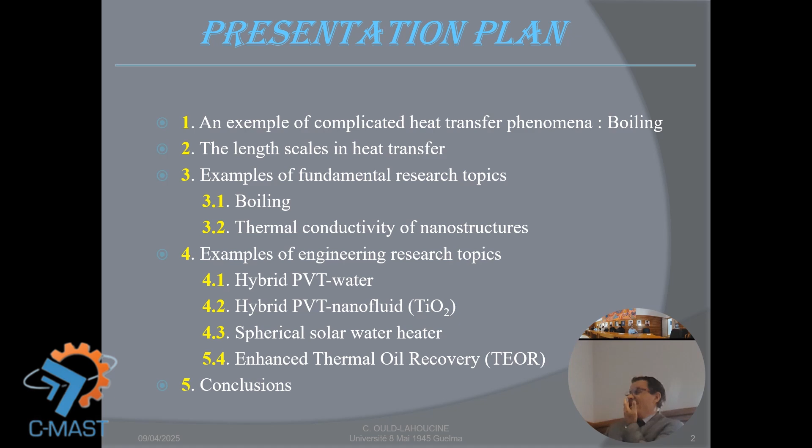And I finish with some conclusion. So that's what happened to me. After I finished the PhD, there is a question: what do I have to do now? Of course, your supervisor decides the topic for you, but once you finish, you have to find your own way. And it's not always easy to find that.

You say, I will continue on the PhD topics. Maybe there is something that everyone is working on, etc. Therefore, I found myself in front of different doors, and I had to decide which door to take. So,

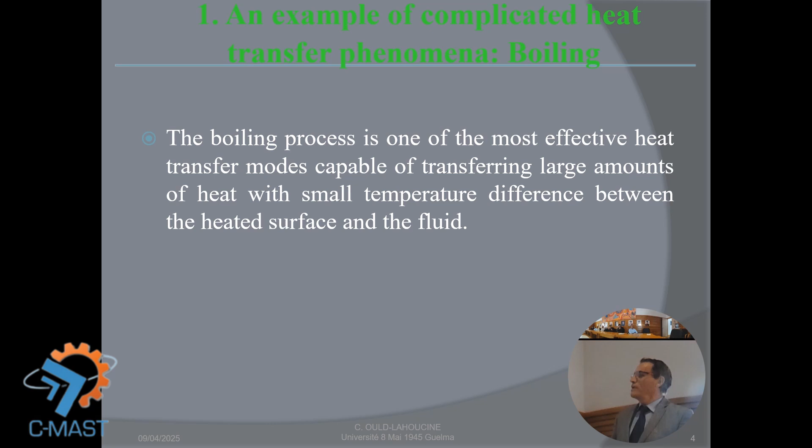the boiling process. The boiling process is one of the most effective heat transfer modes, capable of transferring large amounts of heat. And the main advantage is you can make this heat transfer with a very small temperature difference, which is not the case for the other modes of heat transfer. I will show you in the next slide what I mean by that. So,

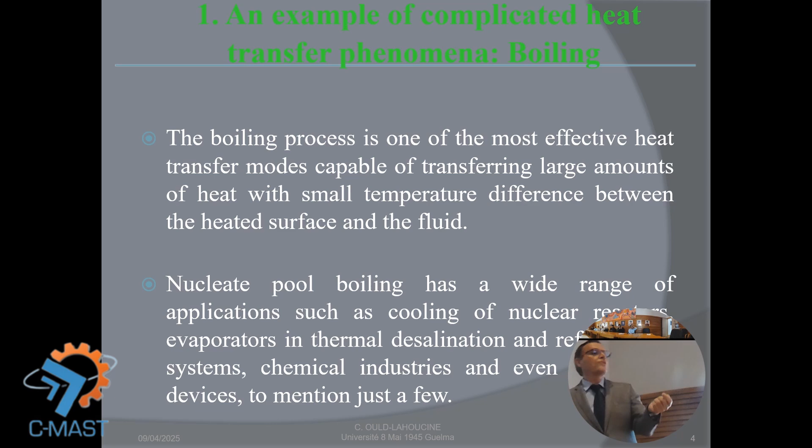within boiling heat transfer, there is what we call nucleate pool boiling. This has a wide range of applications. For example, cooling of nuclear reactors, evaporators, thermal desalination, chemical industries, and even the cooling of microelectronic chips, right? So

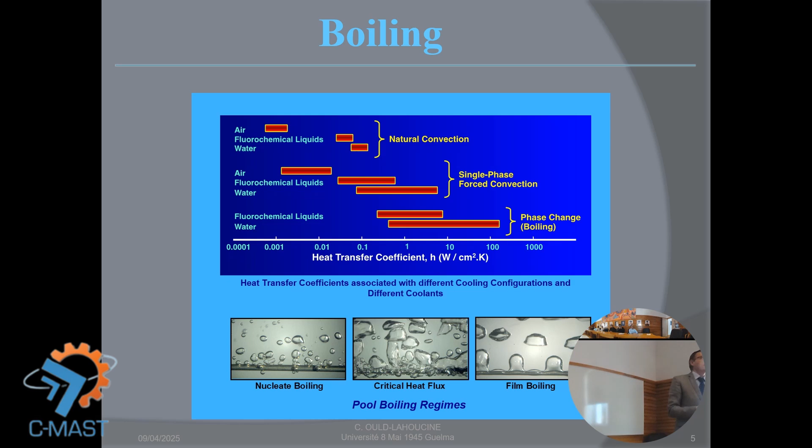because there is a huge amount of heat in nuclear reactors, we need very high heat transfer to remove the maximum of heat. And after that, if you have advanced thermodynamics courses, we can use this to generate vapor, then electricity, and so on.

So we need a high heat transfer coefficient, but we should be very careful about the problem of film boiling. So we need to work as much as possible in this area, nucleate boiling. We get a high heat transfer coefficient while avoiding at the same time the problem of film boiling. So that's an example of heat transfer by boiling.

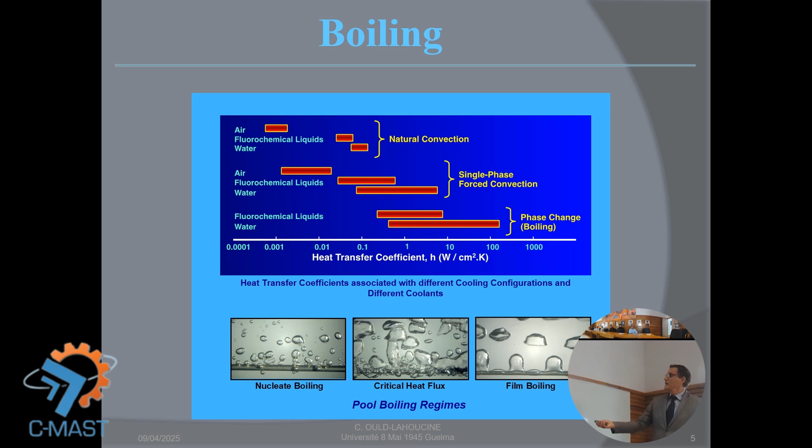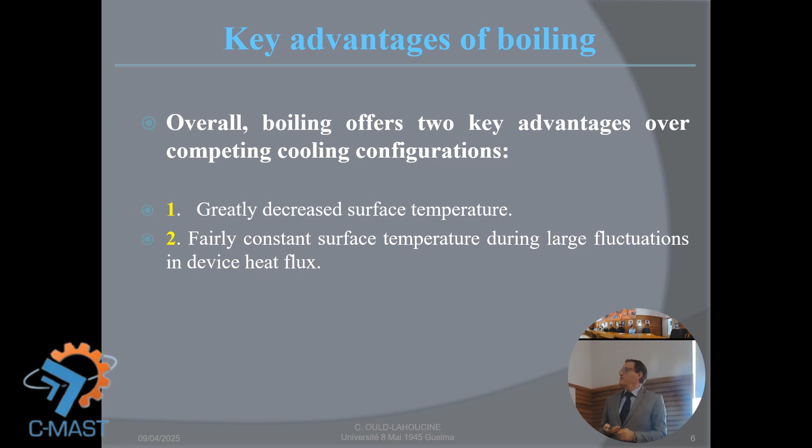Then, overall, to simplify the problem, boiling offers two key advantages compared to other cooling configurations and technologies. The first, as I said, because the heat transfer is so high, we greatly reduce the surface temperature. So cooling is very effective. It's perfect. Next, and this is very important, is a fairly constant surface temperature during large fluctuations in device heat flux. The next slide will explain what I want to say.

Forced convection, you are here, right? So your forced convection, look, here in this region of nucleate boiling, look, this. The slope is so important. What it means? It means that your temperature difference is too small, but heat transfer is increasing so much in this area. So that's why we are interested here.

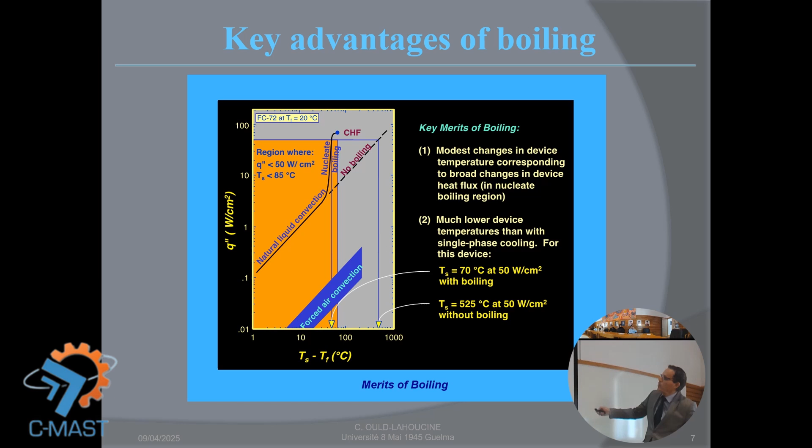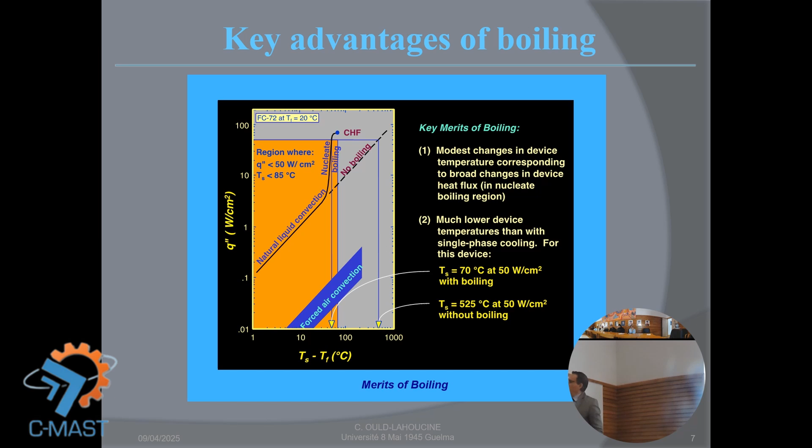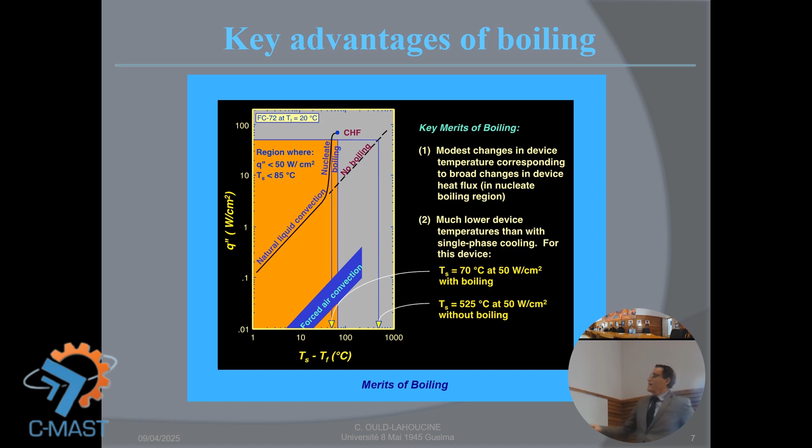Nucleate boiling, temperature difference between the temperature of the plate and the fluid you are using for cooling, right? So it's about very small. For example, this is with boiling, you have 70 degrees. Without boiling, 525. So for sure, you have melting of your nuclear reactors. So that's to show the merit of boiling.

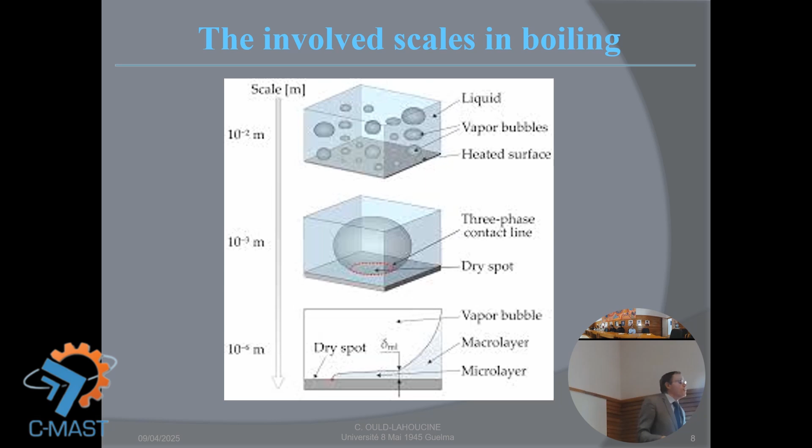So that's the boiling. So we can see here there are different scales to take into account. Otherwise, it's difficult for you to exactly model this complicated phenomenon.

That's what happened, look, it's like the video that I showed. Bubbles are different dimensions and so on. So you have this plate. This is macro scale, or two-fluid model, because you have liquid and vapor.

This is the heating surface, or the heated surface, very important because you need to tackle the problem of interface. How these liquids behave in presence of, for example, a plate in copper. It's not the same with aluminum. That makes this topic very complicated.

And I will show you after that, other things. So if I take one single bubble from this, for example, it behaves on the plate. You have this small groove.

And this is responsible for the nucleus, like a baby. Nucleus, then baby, then a man, etc. Development. And after, we pass away, like the bubble will rise and then disappear.

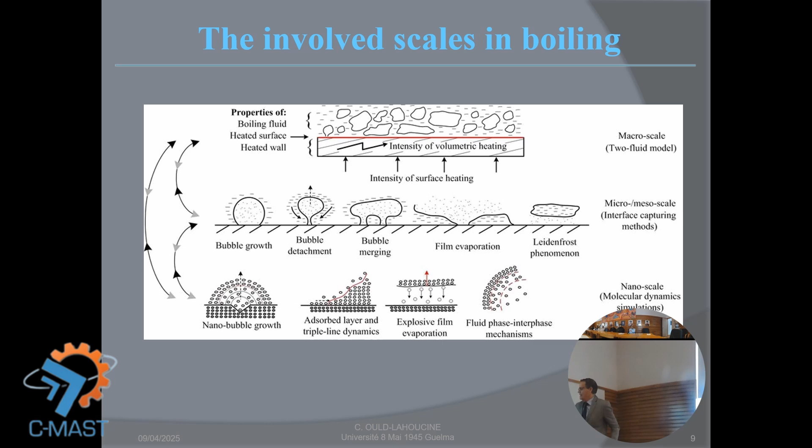So, this is the problem of bubbles. So, different scales.

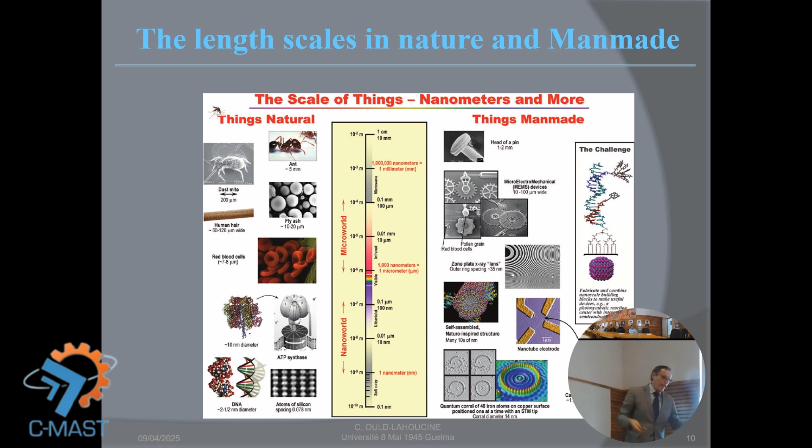This is just to show you the scale of things that exist in nature, the DNA and so on, and for example your hair, etc. This is what humans created by looking to nature, this problem of microelectromechanical systems and so on. So we are trying to fabricate something at the micro scale, and the nanoscale is more complicated, but micro is okay. That's why we use microelectromechanical systems, because it finds applications in different topics, medical and so on. So that scale exists in nature, and humans, in some advanced labs, could even create or fabricate such a small scale.

After that, this is the model. So if I want to model, that's what I was thinking. I said I have to focus on a single bubble, which is wrong, actually. Which is wrong if you think that you can tackle the problem only by modeling one single bubble. This is important to understand, but it's not enough.

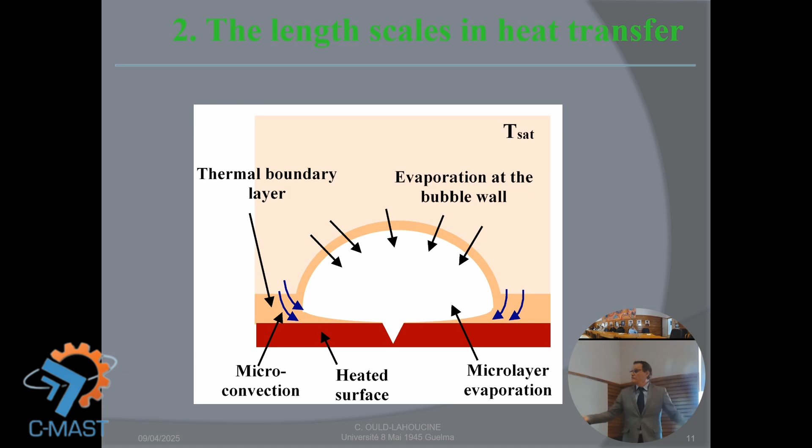So the micro layer, etc. Good. So bubbling, as I said, I return back, because it's created, or the first nucleus is created in a cavity which has a specific angle and depth.

This is shown here. Means that if we use a kind of microscope on the surface of the material, you will find, as you know, that nature is not perfect. I mean, in the way you look at the surface, you feel that it's perfect, but it's perfect only because your eyes' capacity to look at a surface is limited. But if you go down, you find that there are many imperfections. And the idea is like this.

If we want to model the boiling heat transfer, we have to consider everything, of course. Single bubble, yes, but the whole volume. So my idea after I returned back from the United States is to use a kind of statistics. What do I mean by that?

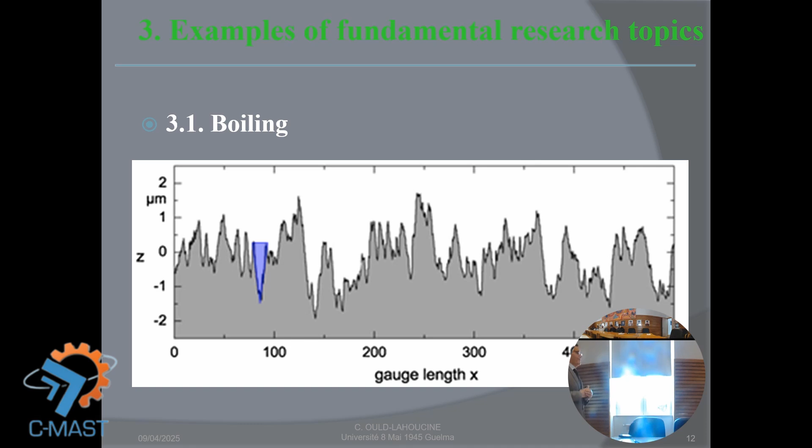Therefore, from the distribution, you can know exactly, on average, what your heat transfer could be using boiling heat transfer, because you can know the number of bubbles and their dimension, and after that you can go down to the scale to model your bubble.

That's what I mean. For example, if you focus on this, look - you will find that here also with a microscope there are other scratched surfaces, and then you can create your distribution, the cavity size range which corresponds to bubble nucleation. This means only in this range you have the number of bubbles that can be created on that surface and detached. The others, none. So you can do some kind of model.

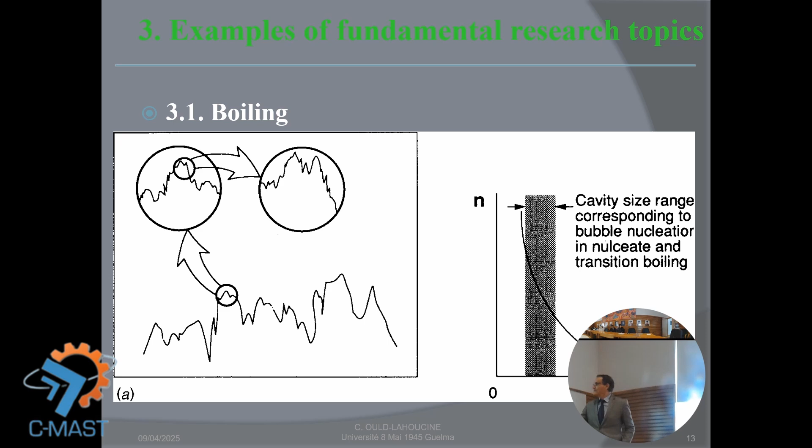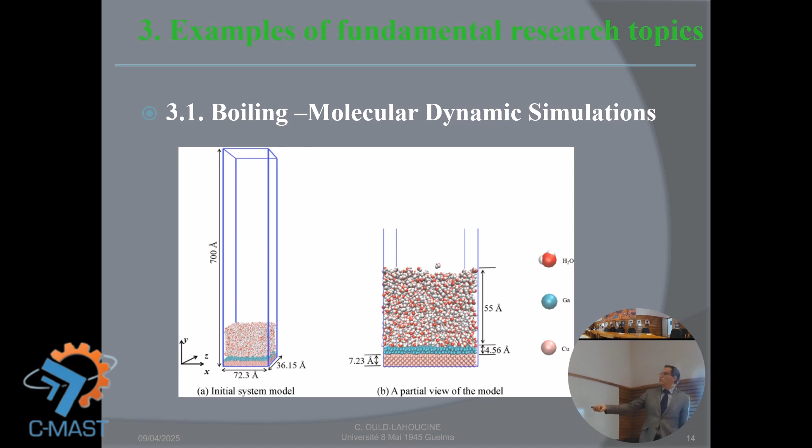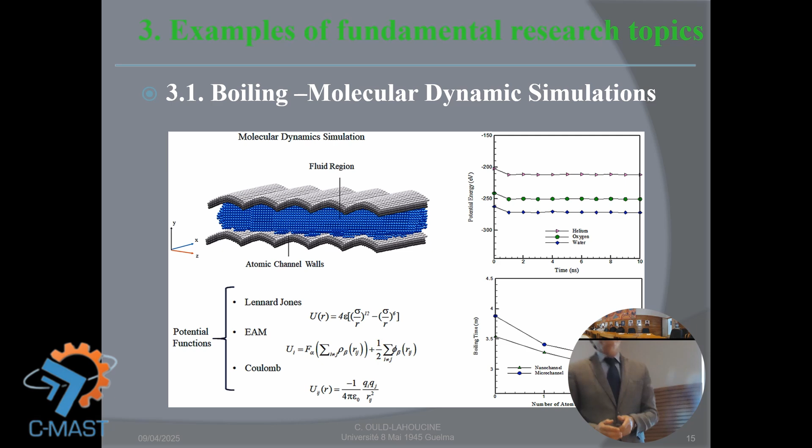But what happens between water and copper, for example? What kind of potential? If you don't have the potential, the forces you are using in the simulation are wrong, because the force is coming from the potential. So those are the weak points of molecular dynamics simulation. Simulation is just for very small scale. And the other problem, the output of that simulation comes from a potential that you suppose is perfect. But in nature, we don't have only the Lennard-Jones potential to determine the forces used in molecular dynamics simulation.

So after I started to learn this nanoscale heat transfer, I said, yeah, that's good. But I returned back to Algeria, I don't have a supercomputer. Even in America, at Georgia Tech, we suffer to get large results from molecular dynamics research. So imagine in my university, we don't have such capacity. Therefore, I have to adapt myself to the actual situation in the university. So I shifted to thermal conductivity of nanostructures. These are nanostructures, some pictures, okay?

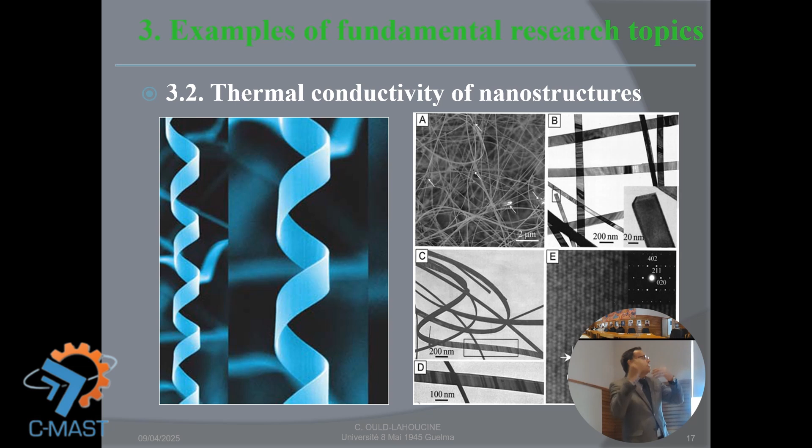Nanotubes and so on. And there are some structures created in the lab by Professor Wang, like millions of Chinese, Wang, but that Wang is at Georgia Tech. Actually, he was even shortlisted as Nobel laureate for physics. He created in the lab different structures with different geometry. This is called a nanobelt, like a belt, you can see here. And even a ring. Of course, he's only interested in creating such nanostructures, and after that, other researchers try to determine their thermal, mechanical, electrical properties, and look for fields where they can find applications.

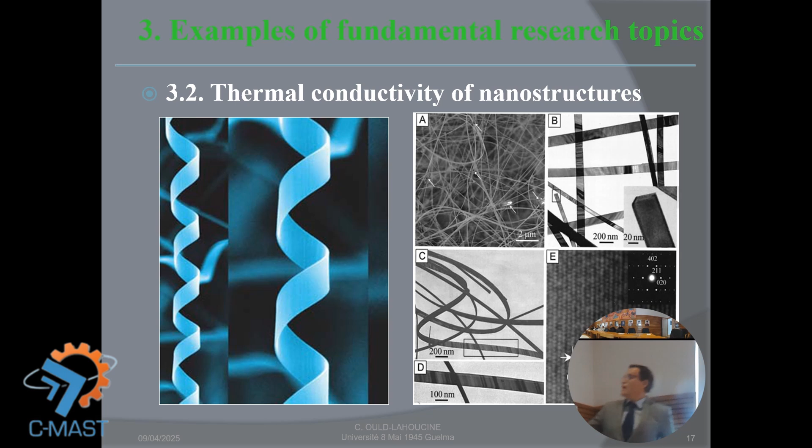So for my case, I said, molecular dynamics simulation, I cannot use it to determine the thermal conductivity of every nanostructure we form. That's impossible. So I was thinking with one of my colleagues and friends in France, Professor Chantrenne, to use what we call the kinetic theory of gas, what we learned in thermodynamics. It looks very strange to use the kinetic theory of gas for solids. Anyway, we tried, and we did some simulation. This is an example of SnO2, tin dioxide.

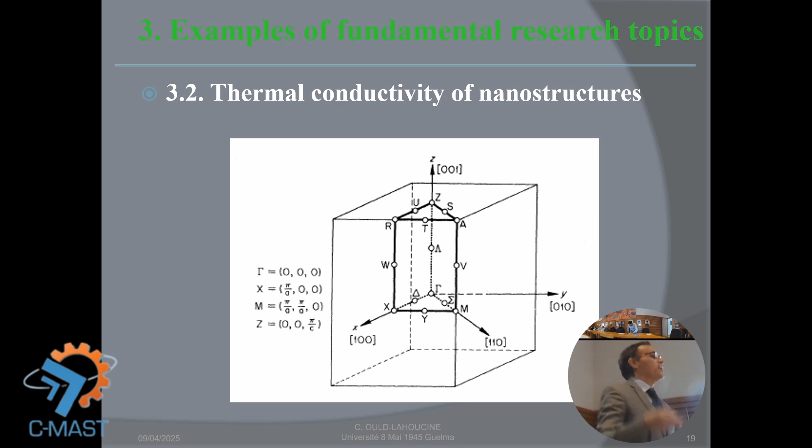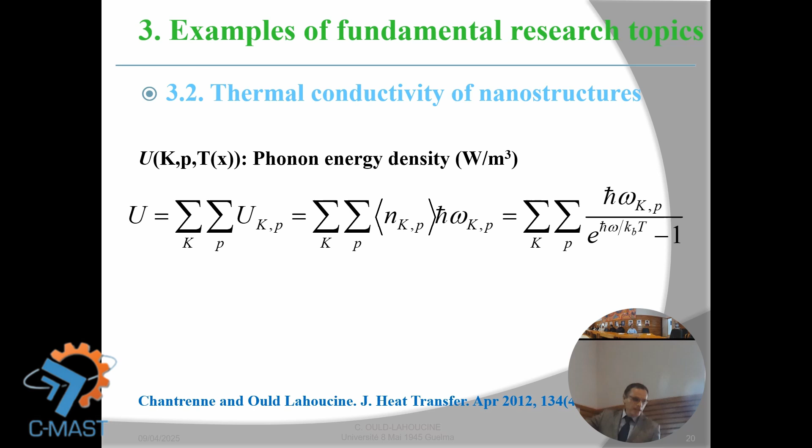Okay, this is physics, so I started learning physics. First Brillouin zone, this kind of thing. I'm coming from an engineering background, so I started looking at books, maybe Kittel, these very famous books, and it's not easy when you are 42 years old, even with kids, everything, but I tried and tried, and I understood the method. Then this is our publication in the Journal of Heat Transfer. So this is the method: you have what we call the phonon energy density, and from that energy we can obtain the heat capacity, which is the derivative of the phonon energy density over temperature. So you see, it's very fundamental research, okay?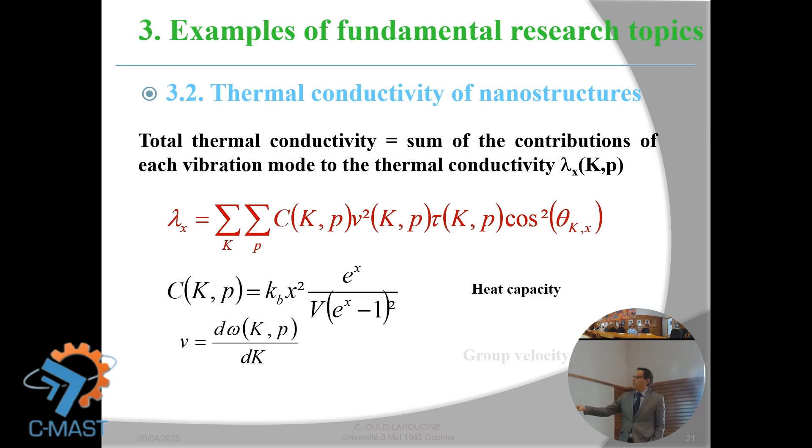So this is capacity and the group velocity and so on. Then I obtained this example. So what we did, actually, I will explain to you. Once you have this model, you have to validate always. This is for everyone. If you are proposing any kind of model, people should trust you.

How can they trust? There are two possibilities. If you have the possibility and capacity to make measurements, that's perfect. You will compare with your own experiment. Or you pick experiments from other guys who have labs with equipment and so on. At that scale it is very difficult.

We are talking about nanoscale, be careful, guys. To find an experiment, even in America, believe me, it's very difficult to make thermal conductivity measurements of nanostructures. It's not easy. Therefore, the method is like this. It is supposed that if you can determine the thermal conductivity of the bulk, the big one, you divide this, and you can obtain the small scale.

So from that model, we go to bulk. And this is thermal conductivity which has been measured by authors, the name is Turks et al. And this is our calculated values. So we can see within this range of temperature, very low up to ambient room temperature, the fitting is very good. That means the model is working. That means we did some kind of validation. After that, I can use this model to determine thermal conductivity of nanostructures.

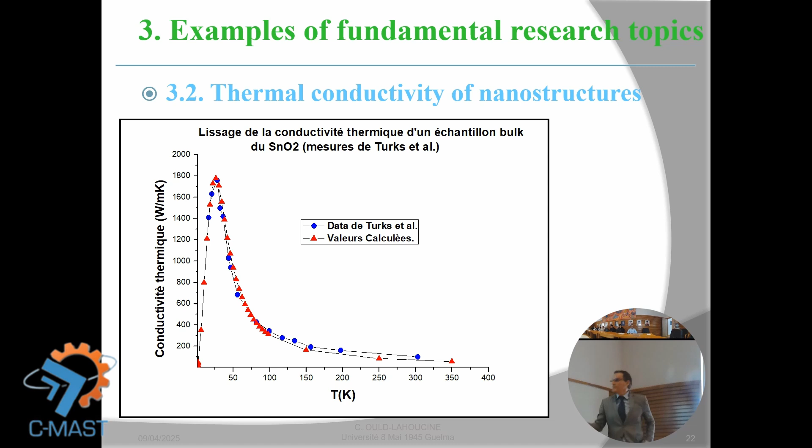So I will show you something interesting. That's the picture. There is one professor who is very famous, he graduated from the University of Berkeley, Li Shi. He's of course Chinese, maybe the name makes it easy to guess. So Li Shi made measurements.

So this is a measurement of Li Shi, for example, a nanobelt of 64 nanometers, right? Yellow is the model proposed by Li Shi. Li Shi is using a Boltzmann equation. So it works for 64. Now, this is the model of Li Shi for 53 nanometers, thinner. And this is the measurement of Li Shi for 53. Wow, huge difference. This is our model for 53. Perfect.

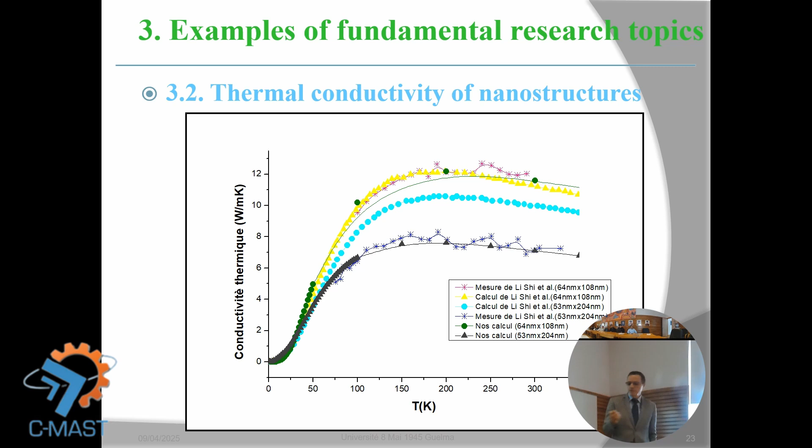That means this method works very well for a specific kind of nanostructure, not everything. For example, some very complicated shape, no. So this is the physics. I don't know if you had such lectures before, what we call the first Brillouin zone. From that Brillouin zone, we use some calculation to determine the wave vectors, and then we make the sum, etc. So that's physics.

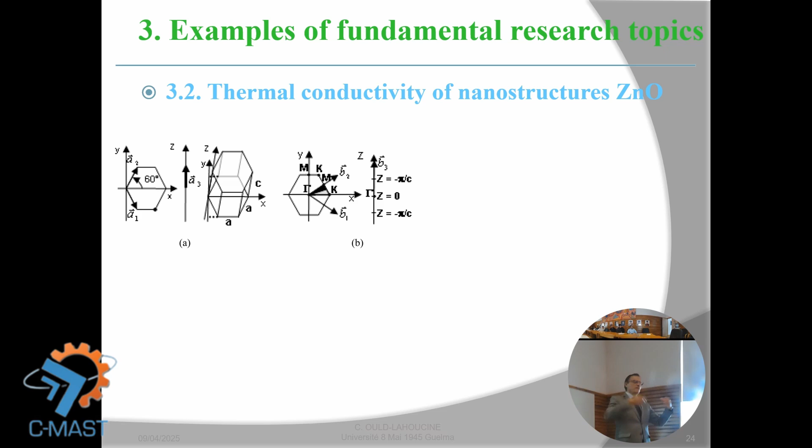Now I pass to engineering. I returned back to Algeria, as I said, and we need to do some engineering projects for our country. One of them is the hybrid photovoltaic thermal PVT collector. As you know, this system can give you simultaneously electricity and hot water, right?

That's good, specifically in some remote areas that don't have access to electricity. In Algeria, of course, because we have natural gas, electricity is almost everywhere. So no problem. But anyway, we can propose this kind of system to some African countries that don't have anything. No electricity, no water.

So the problem here, in hot countries, as you know, with photovoltaic panels, once the ambient temperature goes up, the efficiency goes down. That's a big problem. Therefore, people are always looking to cool such systems. Generally, as we see here, the water is under the PV, right? So the problem is not solved, because solar radiation is coming directly on the PV panels. Of course, you have hot water. This is probably good for Denmark or wherever, but not for Africa, right?

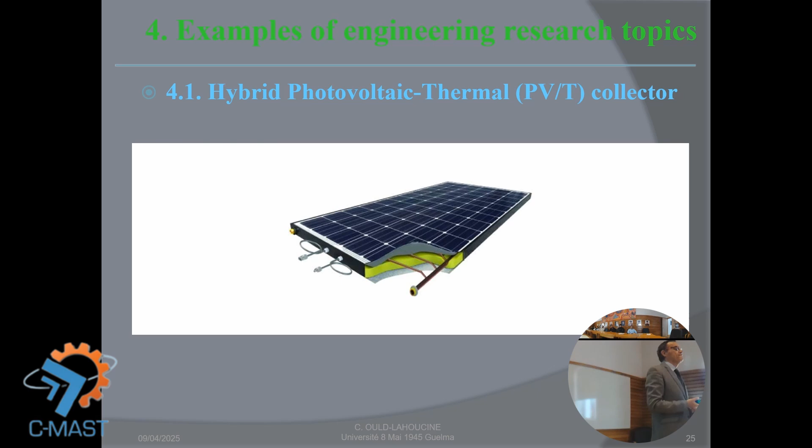So my idea came when I was looking at one article in Nature. In that article I saw that water absorption depends on the wavelength. The majority of the wavelengths that water absorbs are in the infrared. Infrared is responsible for thermal energy. But the visible, no. It's a kind of window that allows the visible to pass. And visible is exactly the wavelength that photovoltaics use. So for me, it's the contrary. I have to put water on top of the PV.

If I put water on the top, water will absorb infrared, giving hot water, and visible light will pass directly to the PV. So I protect my PV panel. That's what we did. So this is the solar radiation, right? And we can see here, look, this is water spectral absorption. It passes, but in that region of wavelength, it absorbs maximum. So thermal energy is absorbed here, and visible will pass here. So this is perfect.

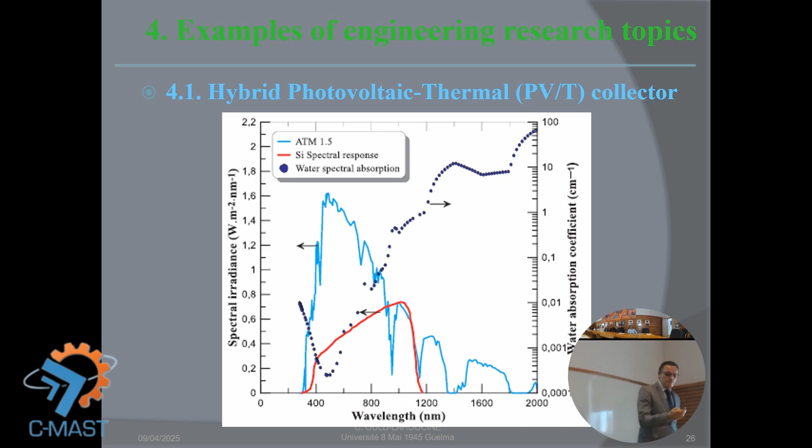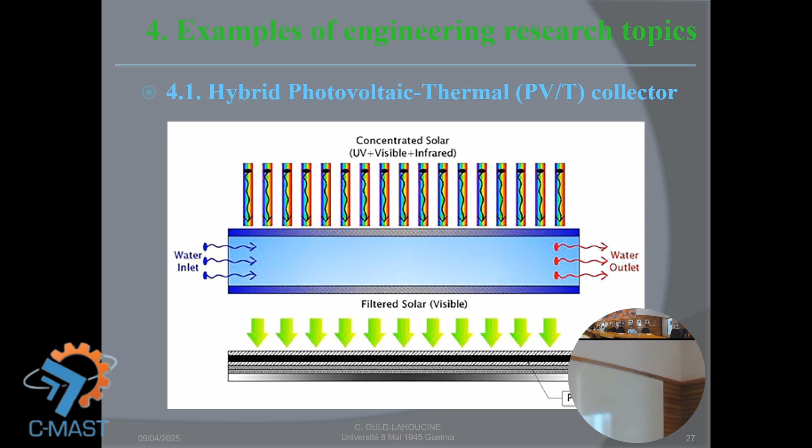Now I have to make a proof. So that's what I mean. This is water, solar concentrated, so it passes. So we have the visible and the infrared together. Okay, so it passes. So water will absorb infrared, hot water goes outside, but visible passes directly to the PV. Good solution for hot countries. So that's the system we propose.

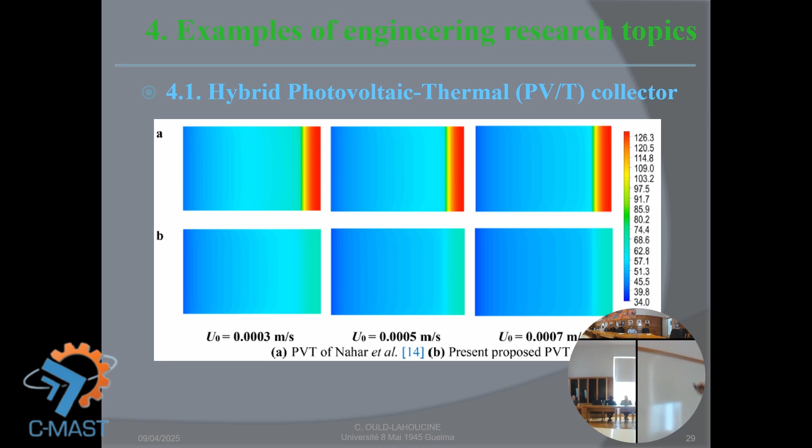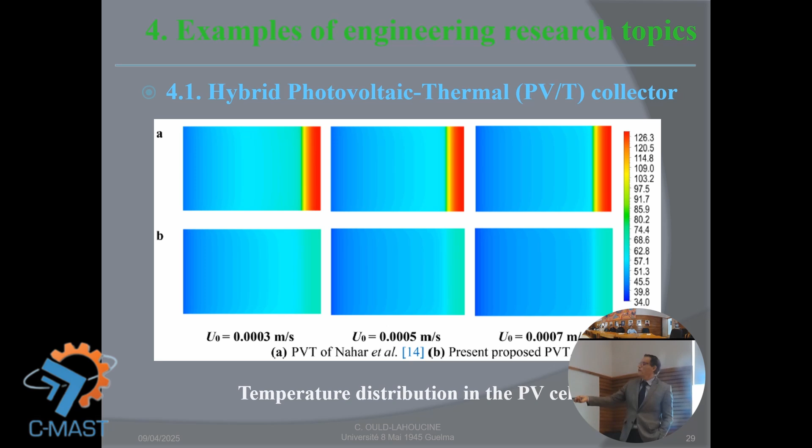But the proposed one is this one. Look, cool. We don't have this kind of hot spot on a specific region, specifically at the end, because after it's hot, warm, and then this is a problem. Sorry. That's an example, and interesting.

So during this modeling, I found something very interesting. Look, in this system, actually, I didn't use the serpentine. I use a channel, because in order to cool the hot surface, I use the channel. But once you're using the channel, there is a height of such channel. So one question which is logical: which height do I have to select? 1 centimeter, 2, 5, by chance? In fact, it's not like this.

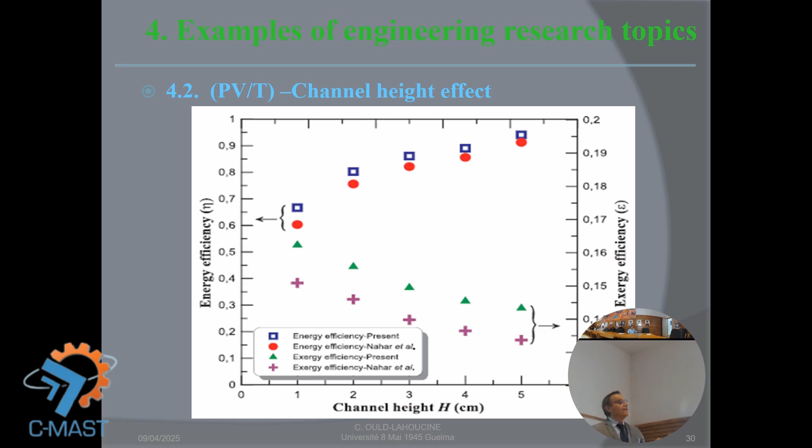Now, in energy, we have also something very important. We call this exergy. What is exergy? Exergy is a quality of energy. Energy doesn't have the same quality. I explain. Electricity is better. For example, today, if there is no electricity, no presentation, but if you bring with you, for example, hot water for me, you give me energy, but I can do nothing with this hot water to make my presentation. So this is energy, and electricity is also energy, but the internal quality is not the same. In PVT, because we need electricity from PV, we have to look at the exergy.

So what happened? Sorry. What happened to this? What happened to this also? To go back? Okay. I don't know. So in exergy, I have to return back.

So what we notice in terms of quality, the quality is working exactly contrary to the efficiency. Means if you increase the height of your channel, quality is reducing. So it's kind of competing effects. And here comes what we call optimization. We need quantity and we need quality at the same time. So competing effects means I have to find a model to determine the optimal channel height. And I succeeded in this.

After that, okay, this is the problem with nanofluids. Everybody heard nanofluid, nanofluid. Nanofluid is increasing heat transfer. Nanofluid is perfect. Okay. There are two main problems. Agglomeration. You know these kinds of particles? They go down. So there is a problem with the pumps. The other problem: in theory, nanostructures are distributed evenly around the whole volume, but in practice it's not that way.

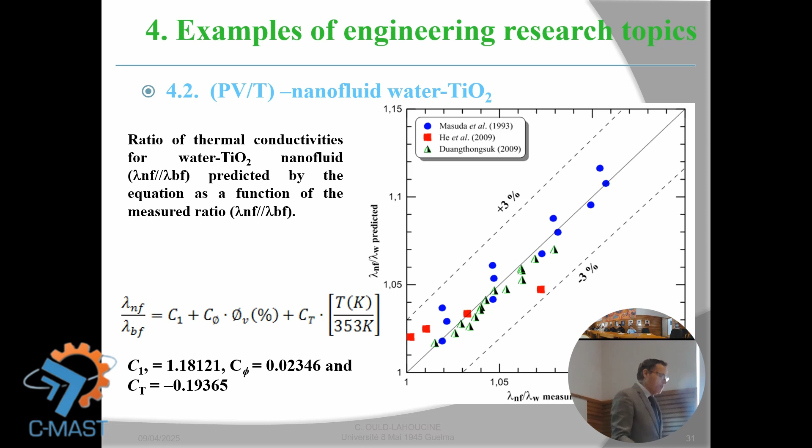Okay. Myself, I proposed this nanofluid type, titanium dioxide nanofluid, and we tried to see if this is really improving heat transfer with the PVT. What we find at the end is different, because this is an equation that I proposed, even as a new equation to determine thermal conductivity of nanofluids. But what we find,

That's what I found. And I was not afraid of the reviewers of international journals. Because if you send to a journal and you are from Algeria, yeah, you have to be fair, people don't trust you so much. They don't know me, what kind of research I did, etc. They said, wow, this guy is really nothing. How can he send us a paper where his research of PVT with nanofluids is very low compared to water? And everybody is saying that nanofluid is the best. Reject.

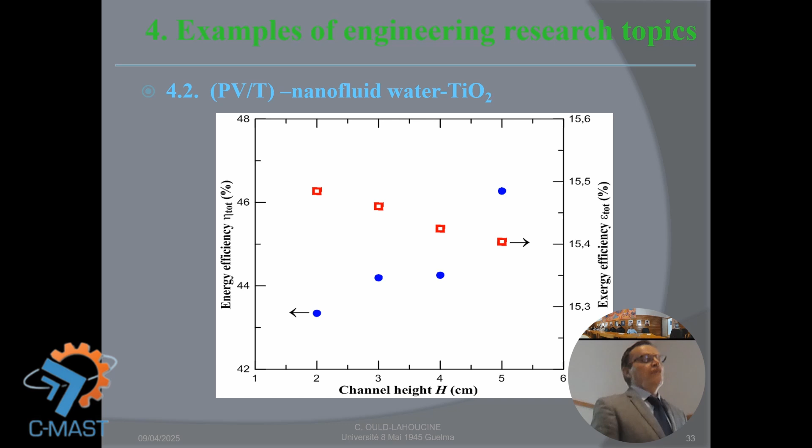So what I did, I sent the paper as it is. It's not good to modify your results. This is also an advice to the young generation. Professors like me, or better than me, they know. But for the young generation, if you check everything and you find the result, look at that result, be confident in yourself, send the paper.

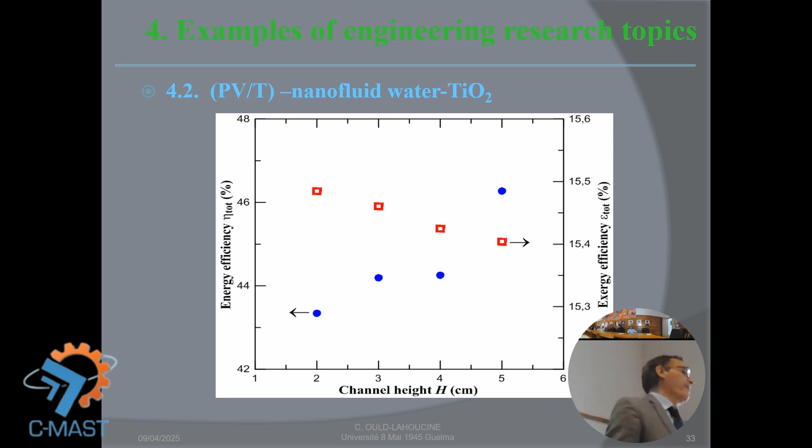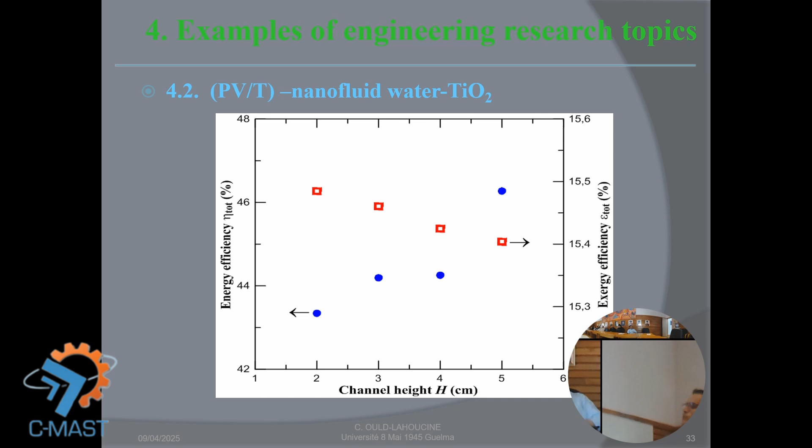The most important discoveries came from something that we didn't expect. If you expect something, everybody will know that, so it cannot be something original. Okay, so here I was thinking about how to determine the optimal channel height. And I found something here. By combining exergy and energy efficiency, I found that there is a kind of inflection point. At that inflection point, this is the optimal height of the channel, 3 something centimeters for that condition.

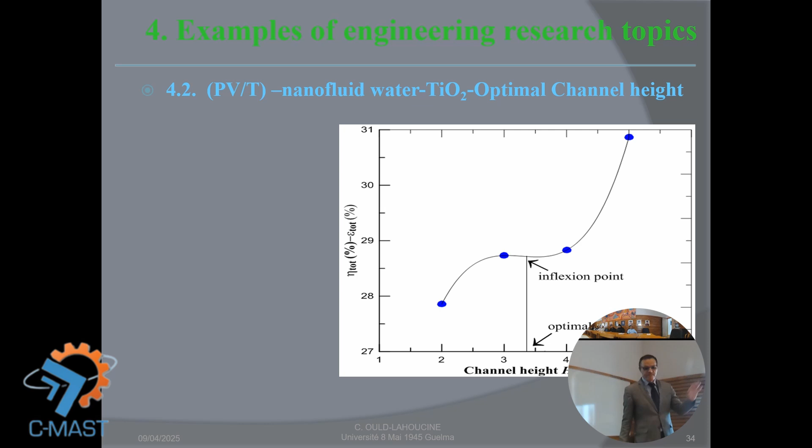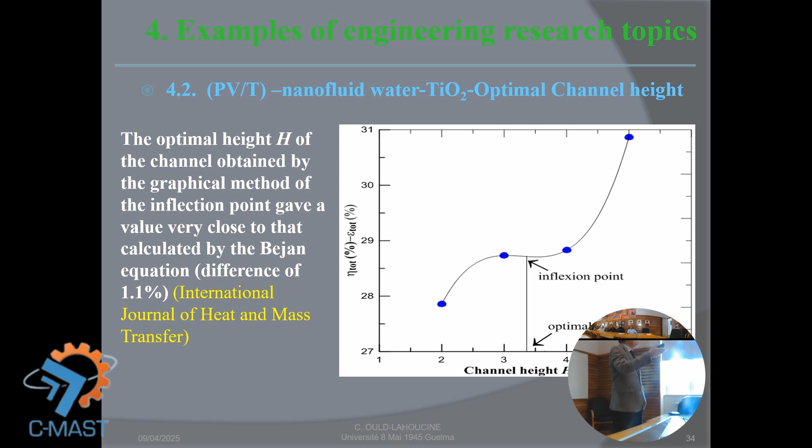That's perfect. It gives you the best in terms of quantity and quality, right? And I compared this method, the optimal height of the channel we obtained, to someone the professor knows very well, Professor Adrian Bejan. He's very famous in thermodynamics and for optimizations. He even has a non-dimensional number with his name, the Bejan number, right? So the difference is about 1%, using the equation of Bejan to find the optimal height versus the proposed method of inflection.

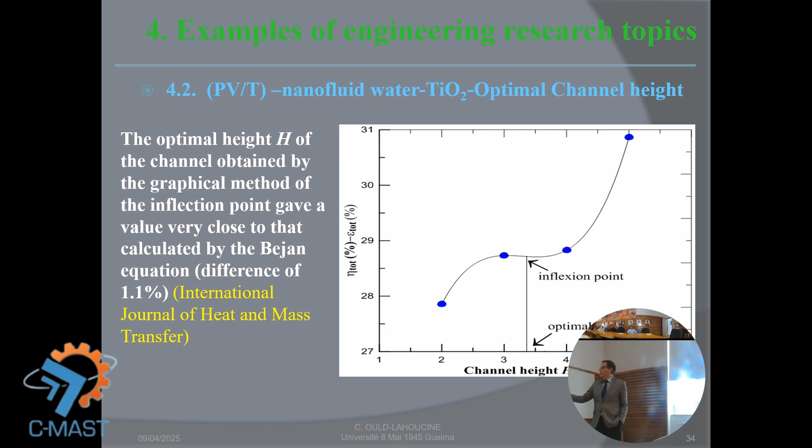So this is my conclusion, actually. I said the water titanium dioxide nanofluid-based hybrid collector has, at least this is what I found, no substantial advantage over the one based on water. And everybody, even one of the reviewers, I sent it to Solar Energy, said no, it's very uncommon. So when I had to answer the reviewers, I said, of course, this is based on my result. If you found any contradiction or something, just reject it, finish. I cannot say anything, that's what I found.

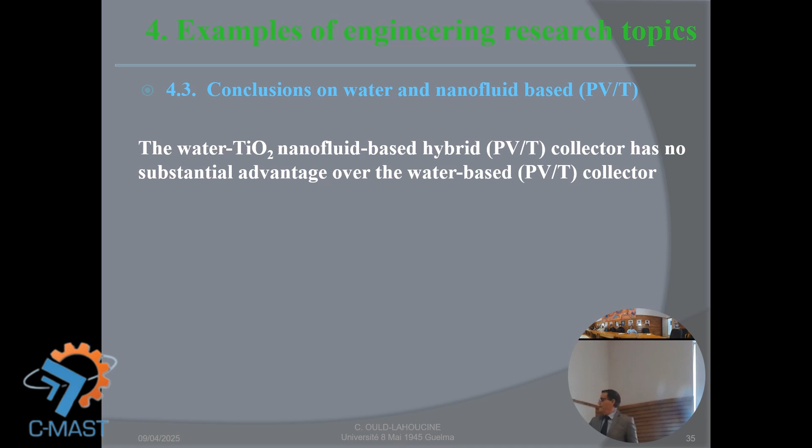Next, so that's what I said, I don't follow the trends. That's my career. I don't say this is the best career if we compare, but that's my own way. I don't follow trends. I just set my own goal and go for the extreme. I do my best. Okay?

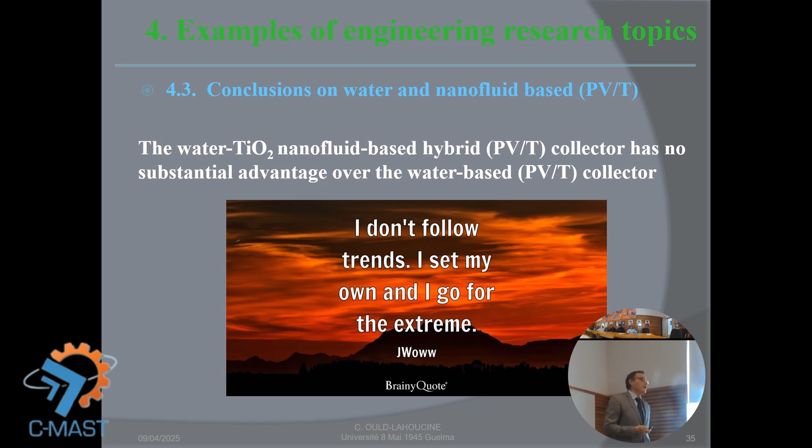Then I proposed something new also, a spherical solar water heater. This is also something interesting because in solar energy, as you know, the sun is not sitting the whole day in the same position. Therefore, your efficiency is not the same the whole day, right? So the idea is that if you have a spherical surface, at every time there is some part of your collector that is receiving electromagnetic energy from the sun.

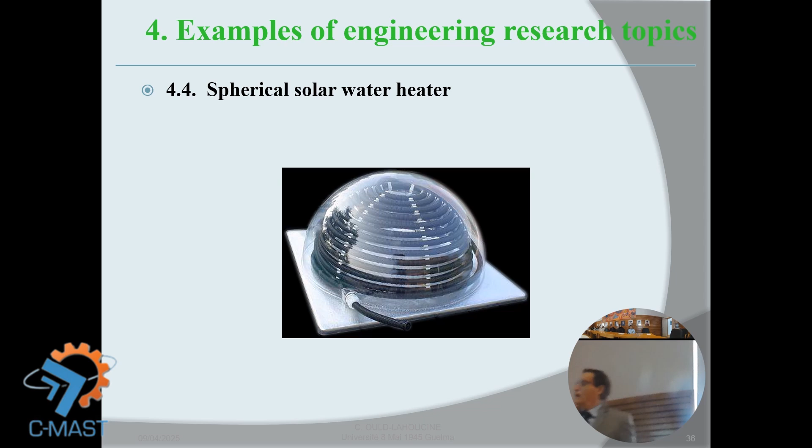But generally what they did, because this idea exists already, they separate the collector from the tank that you have to store your thermal energy. But for my case, to reduce the volume, etc., I said, why not put it inside? Generally they use the spherical one, right? For my case, I said probably there is a kind of optimal geometry for the tank that could store the energy more efficiently.

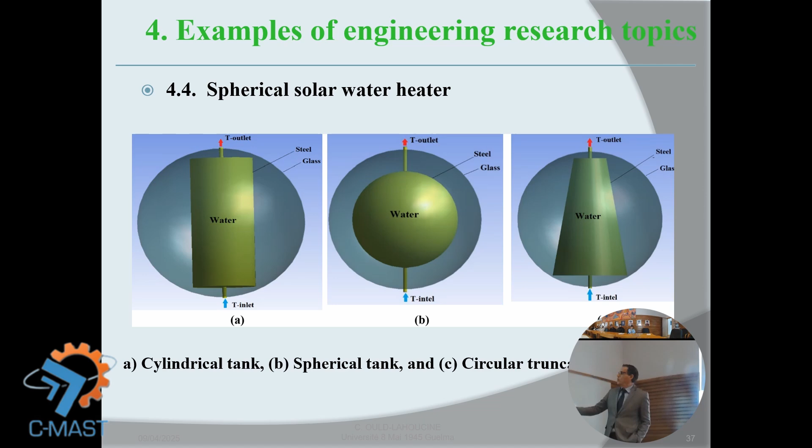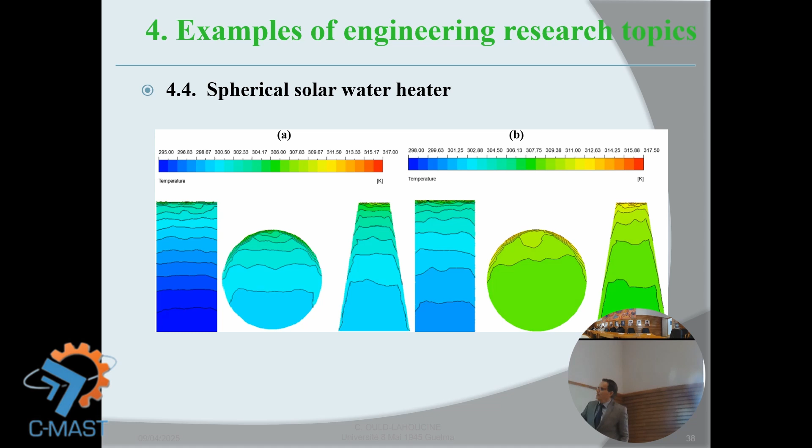And here we see that the majority of the volume has the same temperature, meaning there is mixing between the fluids. Here, no. Look. So the conical one and the cylindrical one are better. This is time, okay? This is for 600 seconds, and this is for the double, 1,200.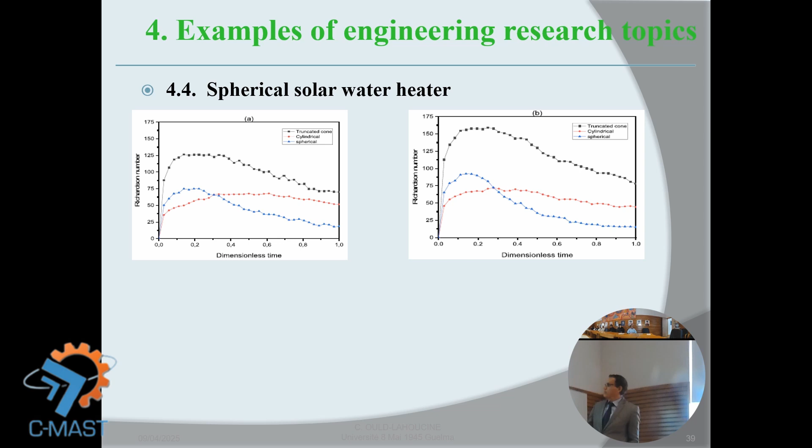So if you are using such equipment of solar energy and you want it to be used for a long period of time, it's better to use the spherical with the cylindrical one. But the best, if we compare in terms of efficiency and quality, is the conical one. So I tried to make a patent also about this, but not yet. So this is the Richardson number to compare between them. So I arrived at something very interesting.

Maybe also I'd like to take a little bit of time. So one day I was invited by one of the biggest oil companies in the world, the Algerian company. Because of this company, we are eating bread, as we say, because a lot of billions of money is coming from, as you know, oil and natural gas. And they invited me to make a research proposal. Good. So I was happy.

So there is a very interesting topic. This topic can bring billions of dollars to our company, not millions. The enhanced oil recovery project. I will explain to you.

So, the oil we can extract is not everything. The oil has high viscosity, so it's stuck on the rock, deep inside. And with our technology, we cannot extract such petrol or oil. And sometimes the quantity that we cannot really extract is around 60% of the whole reservoir. So you just extract like 40%. So that's what I mean. The recovery rate is the percentage of recoverable oil compared to the total amount initially in place.

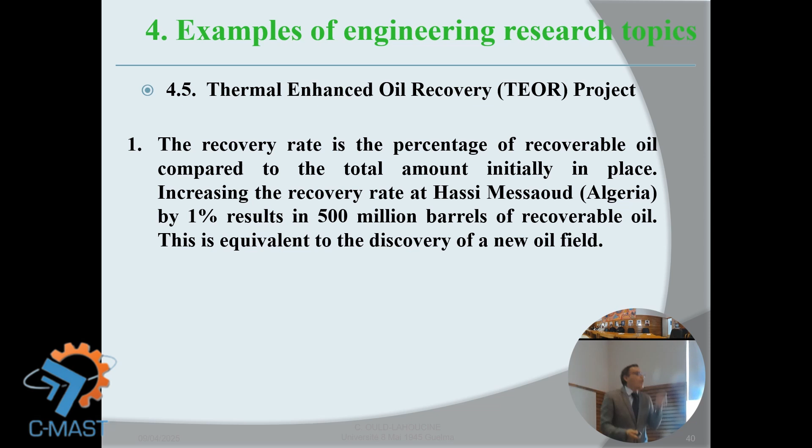The example of this site called Hassi Messaoud, one of the biggest in the world, very famous. Imagine, since the French occupied Algeria, they discovered Hassi Messaoud, and until today we still extract oil from it. So the amount is huge. But if I can, for example, propose to them a technology to recover 1% only, 1% is 500 million barrels of recoverable oil, which is equivalent to discovering a new field. Okay, so this is what I proposed to them. This is very important.

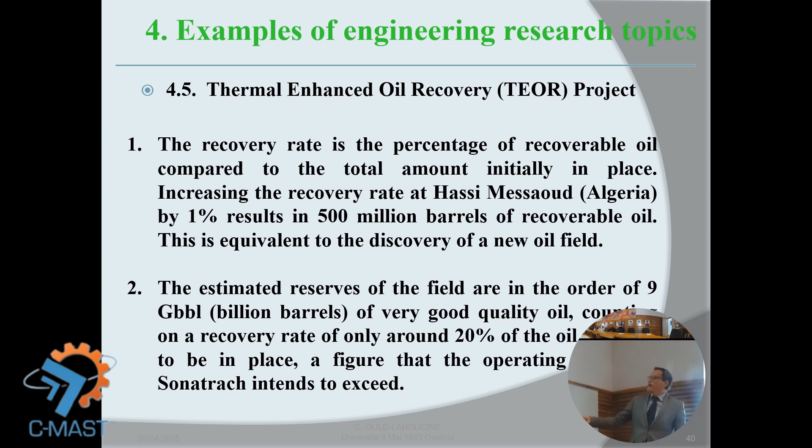I proposed what we call a thermal enhanced oil recovery project. Thermal recovery is a successful technique. Why? Because it involves burning natural gas. So in this region, for example, they have natural gas. They burn it to make vapor, right? And then you inject such vapor inside because it's hot and vapor can go everywhere, not like liquids. So it warms the oil, reduces viscosity, then you can extract the oil. That's the idea. So natural gas produces steam, which is injected into the reservoir to heat the heavy oil and reduce its viscosity.

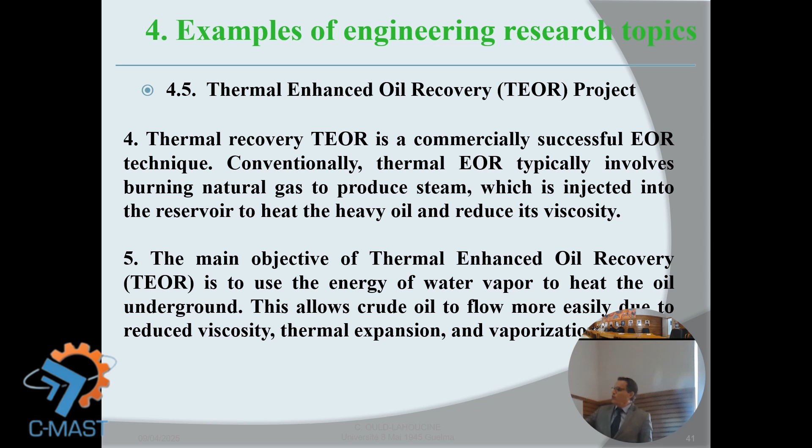So the main objective, as I said, is to heat the oil underground and to reduce viscosity. What happens? Look, this is oil, and this is water. Generally, because this project exists, for example, in the United States of America, they use natural gas. You burn it to get hot water at very high pressure. So this could also be an interesting topic for people in your lab, because they are working on high pressure, because here high pressure is very important to model things.

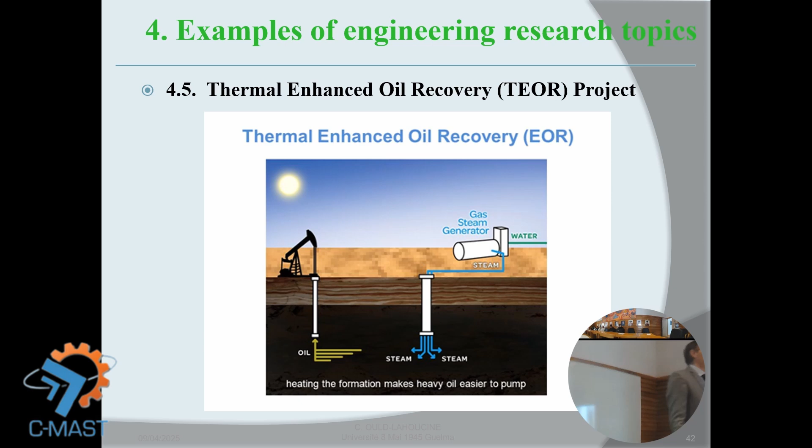So then you inject steam inside. This is oil. In these areas, the oil viscosity is too high. So you reduce this, and of course you can extract I don't know how many million barrels. So that's very important. So my idea is like this. Instead of using natural gas, I will use something that is in competition with conventional energy, solar. People always think that solar is in competition with conventional energy. For me, they can collaborate. So we use this technology to warm up the water, generating vapor, and then injecting such vapor inside.

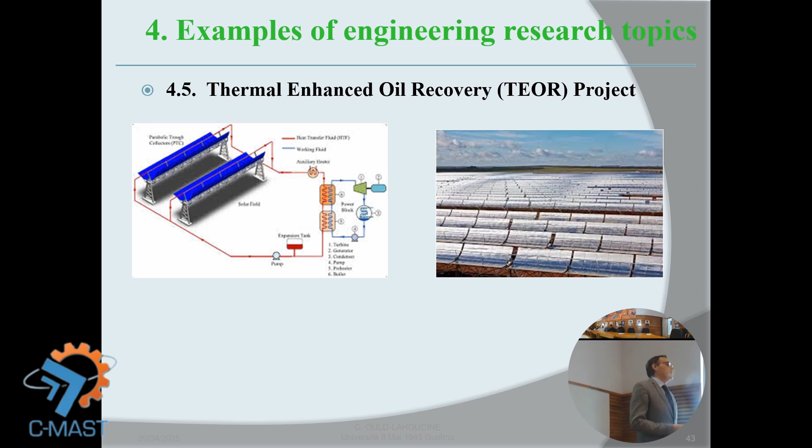So that's the cylindrical panels. And what is interesting in Hassi Messaoud also, be careful, because if I talk about such an application, location is very important. Why? If you don't have water, no way. But in that region, there is even an ocean underground in Hassi Messaoud. So there is water, so no problem.

So the solar technology uses the technology of the greenhouse. Why? Because in the south, I don't know if one of you has already visited any Sahara, not only the Algerian one, you have dust. So this will damage and also reduce the efficiency of your panels. This is problematic. So the idea is using a greenhouse to protect them. Okay, look, like this.

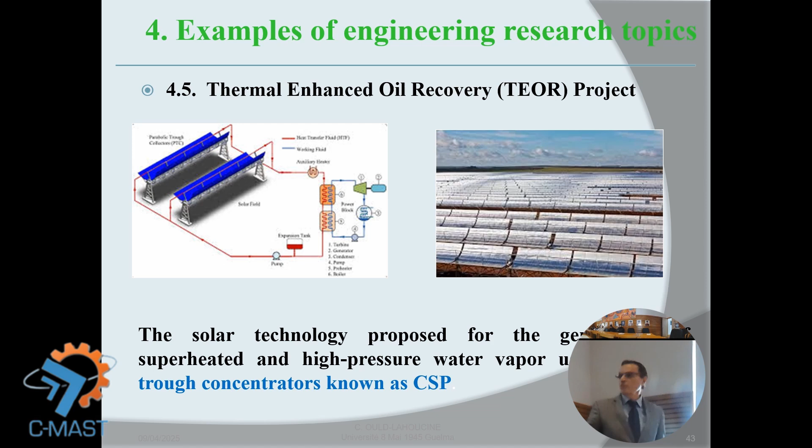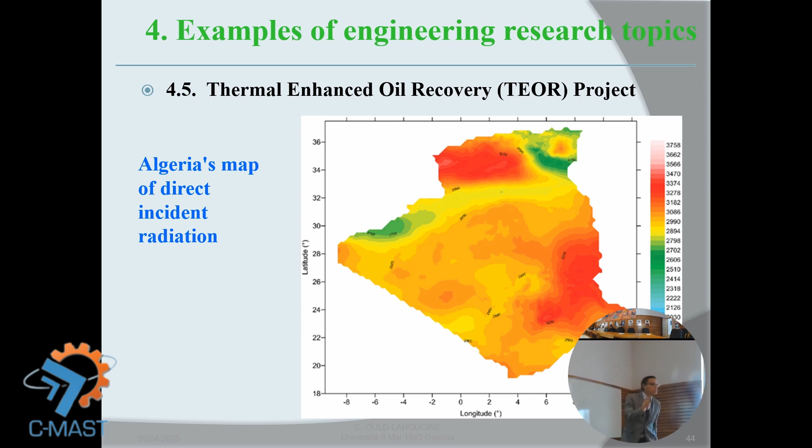And this is perfect. So I showed this to Sonatrach. I said, because Sonatrach has other oils somewhere, it's not working there. But here, for that, Hassi Messaoud, very good, no problem. Anyway, that's what I need.

Greenhouse, it looks like this by artificial intelligence. So this protects from sand, because we have sand, etc., so it will destroy efficiency.

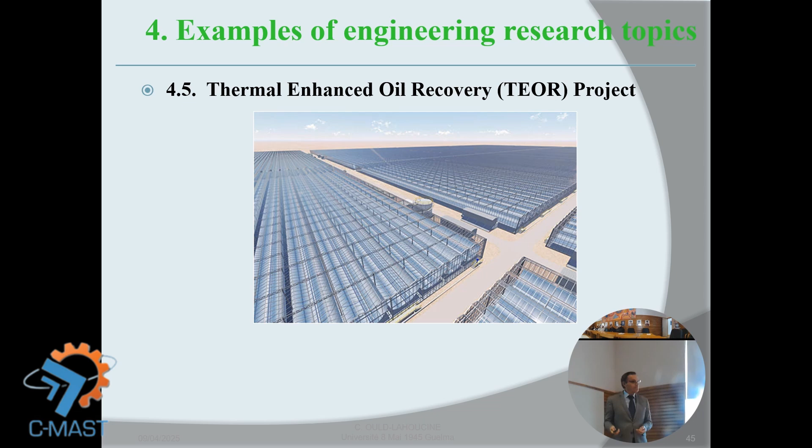So I made this presentation in front of very experienced panels, and they were very satisfied. So what they did, suspense, like in the movies, as I said, sand. Actually, they gave me something. I'm here, and this guy is old, so has a very high position in our company.

And finally, I was happy at the end, but just a certificate of recognition, unfortunately, no financial support. That's what happened. So research, sometimes you can propose very good ideas, but it's not always that everyone can help you. The system of financial support, for example, if I were in America, it's different.

There is one guy from Algeria, he's very famous. He used to be the chairman of the National Institute of Health. He did his research in the United States. At first, he went to France. That guy is a doctor, his name is Elias Zerhouni, very famous for, he discovered some system using electromagnetics for checking the cancers early, yes. So he went first to France, and then he got some idea and said to his supervisor,

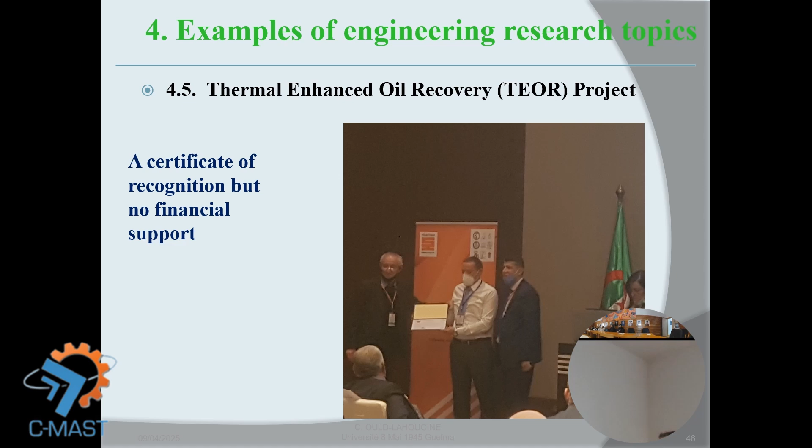So here, no way. So as I said, there is a kind of paradox that we can use solar energy to increase conventional oil energy in Algeria. It's possible, of course, sometimes to combine the two forms of energy. They are not really, in my opinion, really in competition. If you can solve the problems of pollution, that's perfect.

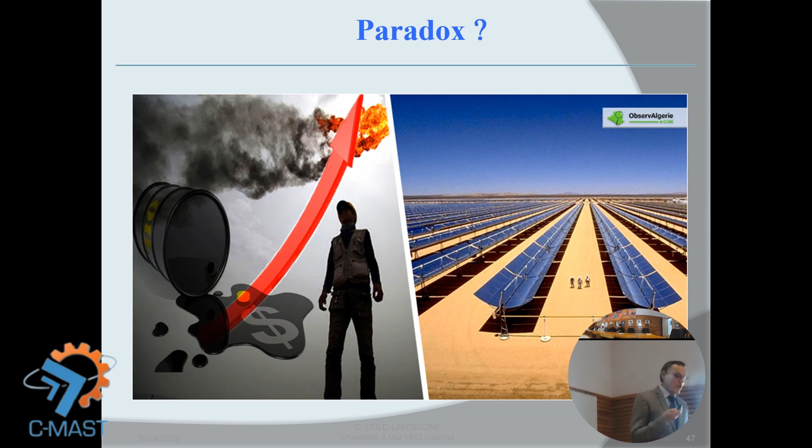We need collaboration, and that's why I'm here. I came to this university not only to see this beautiful country of Portugal, but also to make some contribution, to work together if possible, of course. So that's the way.

So no one can make good research alone, no one. Pluridisciplinary research groups are mandatory, it's not an option.

International collaboration, it leads to what? Addressing global challenges through united efforts, enhancing academic quality and reputation, visibility of your research, and so on. Cultural exchange, coming from different cultural backgrounds to Portugal, and building international networks, and broadening research horizons and resources.